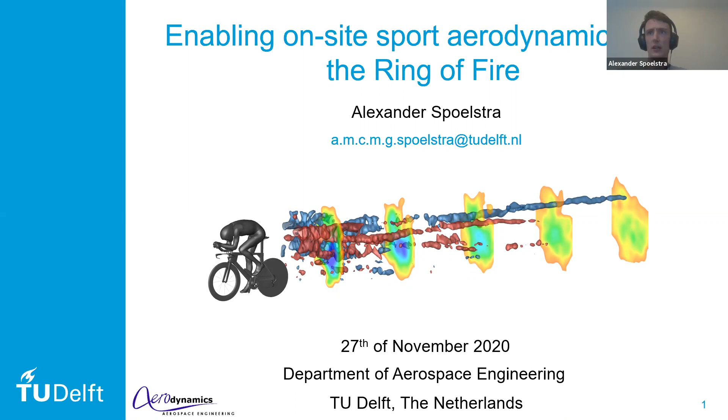With the Ring of Fire, we would like to make an addition to that, namely an on-site technique that is also able to visualize the flow field. So what is the Ring of Fire? Well, it's a system that performs on-site, full-scale aerodynamic drag measurements on an athlete in the field, while cycling

on a track or on the road. At the same time, we make quantitative flow visualizations in the wake of the athlete, using PIV, particle image velocimetry, and then we can relate these flow visualizations to the drag force. That's the main concept. So how do we get this drag force from the Ring of Fire?

As you see in this animation, we take a few velocity fields. We measure velocity fields upstream before passage of the cyclist, and we measure velocity fields in its wake, and then we set up a control volume. A different way of looking at it

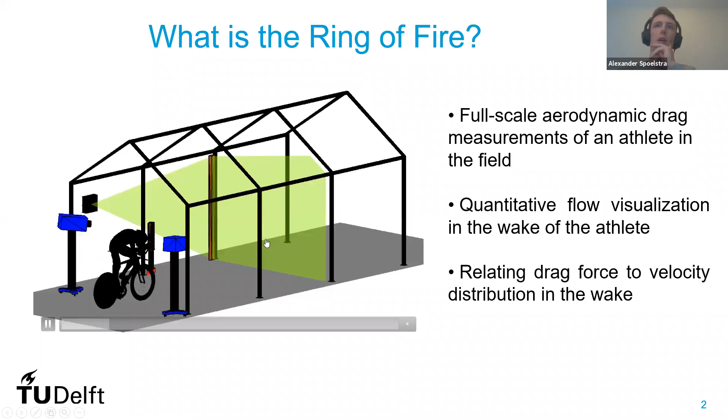is in this frame of reference, where our cyclist is moving at a constant velocity uc. We measure our environmental velocity field and our wake velocity field, and then we set up a control volume, a momentum balance, where if we take the flow fields upstream and downstream of the cyclist far enough away, we can neglect the pressure term. We are left with an equation that only depends on the environmental velocity field, the wake velocity field that we measure, the cyclist velocity, and the density of the flow.

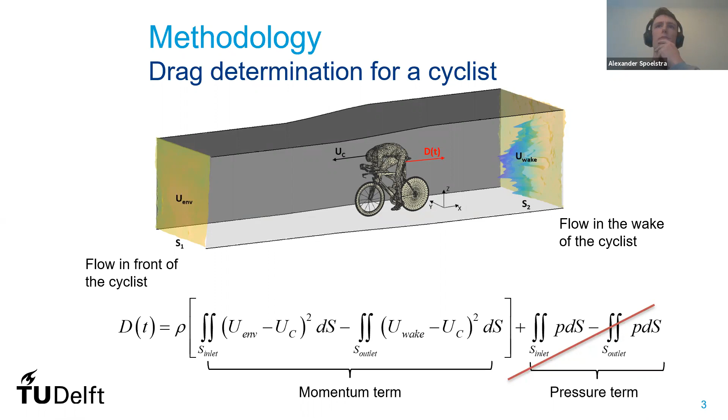This idea of the Ring of Fire actually came around in 2015 by Sciacchitano et al., who imagined that the use of helium-filled soap bubbles could increase the scale of PIV measurements, allowing us to perform on-site measurements on a full-scale cyclist.

In 2017, Terra et al. performed the first proof of concept study, to see if this idea of the Ring of Fire would actually work, on a small-scale sphere of diameter 10 centimeters. I will not go too much into detail on those results, but I will mainly focus in this presentation on the 4 experiments that we have done with cyclists.

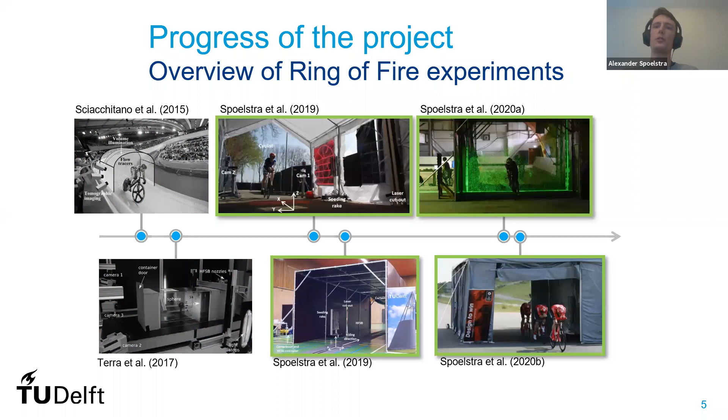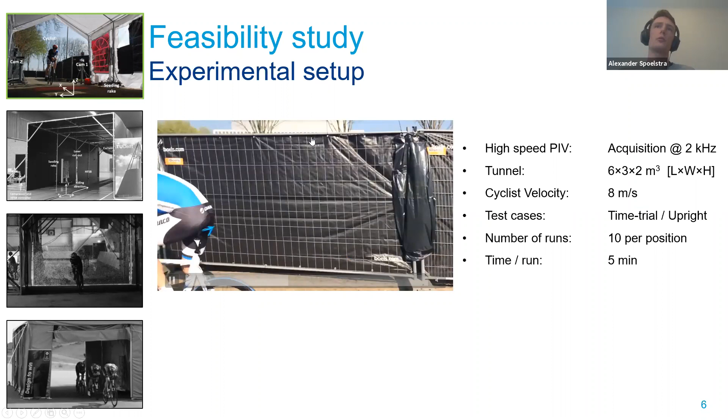The first experiment that we have done with a real-life cyclist was in the back of our lab, with a party tent. We set up a tunnel to confine the bubbles. We let our cyclist pass through there at 8 meters per second, around 30 kilometers per hour, in both time trial and upright position. So you see him here in the video passing in upright position.

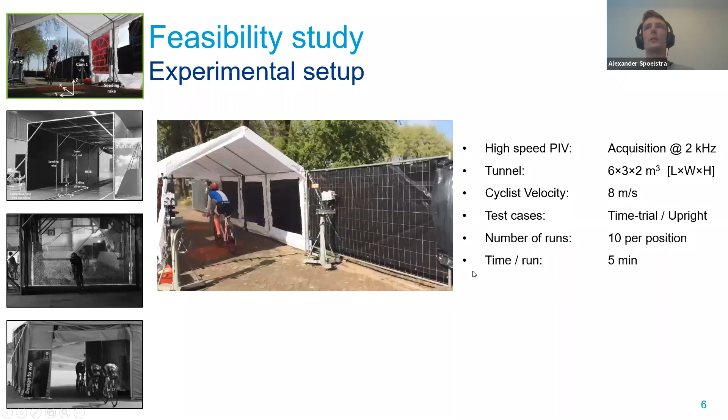We let him pass 10 times in each position, and we acquired the data at 2 kilohertz, because at that point in time we were still not 100% sure which data would be interesting for us. So we tried to measure as much as possible.

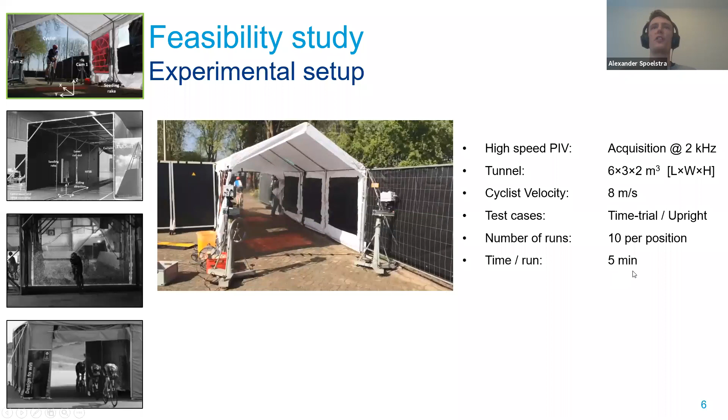The downside of measuring at such a high frequency is that we gather a lot of data, and to store that data, to transfer it from the camera to the computer, took about 5 minutes per run, per measurement. That's not ideal for future applications, where if you want to do a measurement on a track, you would ideally do a measurement every 20 seconds.

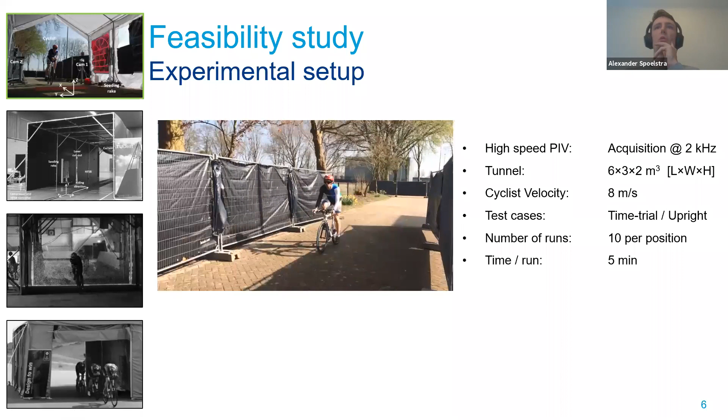Looking into some results of this experiment, we first got the flow visualization. We compared it to literature, and we saw quite good agreement there with wind tunnel tests. Then we looked at the development of the wake

over time, and we saw, as we expected, that the peak velocity deficit in the wake decreased over time, and the wake broadened over time. What we didn't expect was that in the far wake, our field of view would be too small and the wake would go outside of the field of view. So that was already a learning point, number one.

Below, you see a nice visualization where we see some vortices, and then velocity planes over time in the wake.

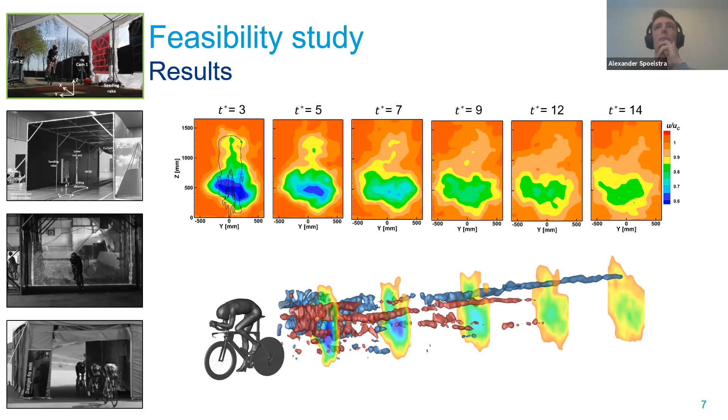Converting these velocity fields to drag, we see that for the upright and the time trial position, we can actually measure the distinct variation. We expect high drag for the upright case and lower drag for the time trial case, the aero position.

When we compare this to literature values, we saw that we are at least in the right region of drag, so we are actually measuring the correct amounts of drag.

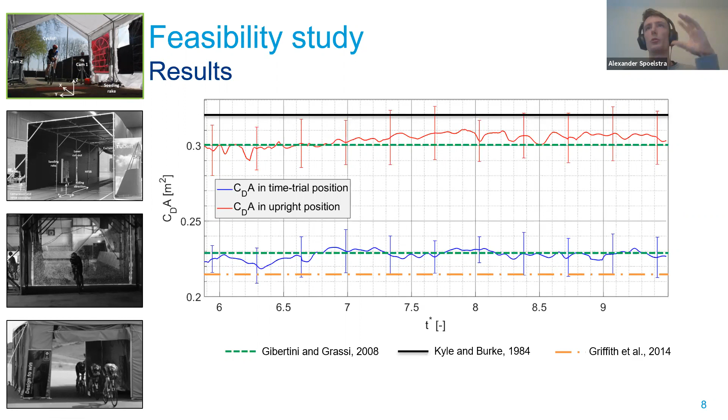So we still see that there is plus minus 5% uncertainty, which is rather high. So we wanted to repeat this experiment in a more controlled environment to see if we could reduce the uncertainty on these measurements. So we did a second experiment.

As you see from the video, it was already a bit more professional. We increased the size of the tunnel to reduce the blockage. This time we used a low-speed PIV system, since we learned from the previous experiment that if we have a measurement plane every meter or 1.5 meters, we would have enough data.

For drag computation, we let our cyclist pass at 5 meters per second, which is a bit on the low side for professional cyclists, but as you can see, the sports hall was not that big, so the speed was really limited because of the size of the hall. We repeated the same configurations, time trial and upright, and had about 30 runs per position this time.

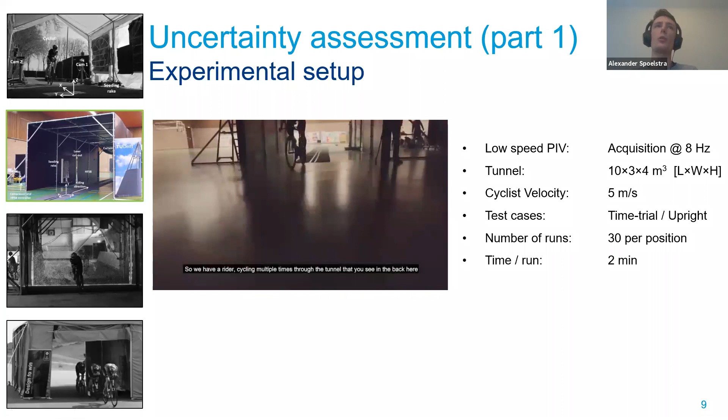Because we used a low speed system, our time per run was already reduced to about 2 minutes. If we compare the drag values of this indoor experiment on the left here to our outdoor experiment, which I present on the right, we see that we again capture the difference between upright and time trial position.

By going indoor to a more controlled environment, we already reduced the uncertainty to plus minus 2.5%. I have to say here that the fact that the average drag is different is because we used a different bike and different cyclists in both experiments. So we only look at the deltas and at the uncertainties here.

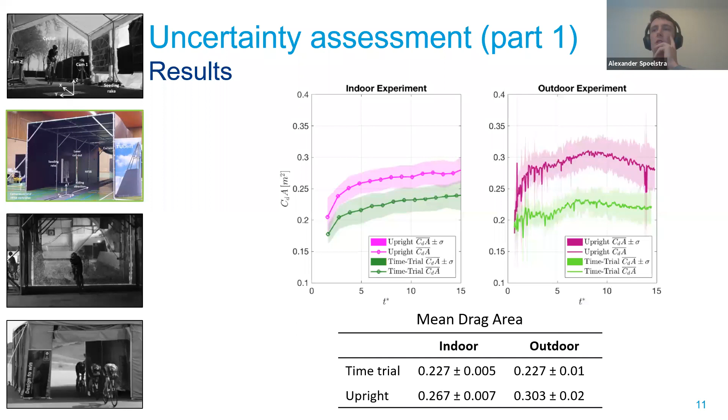So for this experiment, we already reduced it to plus minus 2.5%. Then we again compared it to literature values. In the previous experiment, I showed you that the ring of fire was in the right area of drag values, and I chose three studies that were close to our results.

If we now take a larger set of data from literature, we see that first of all there's quite a spread in the literature, but our ring of fire data falls nicely into that spread of drag values that we see in literature. However, we are still a bit on the low side of the velocity spectrum.

So the next thing we wanted to try with the next experiment was two things: can we first determine where the uncertainty is coming from? What is influencing this plus minus 2.5% uncertainty? And second, can we perform simultaneous power meter measurements, the track measurements that Harm was talking about before?

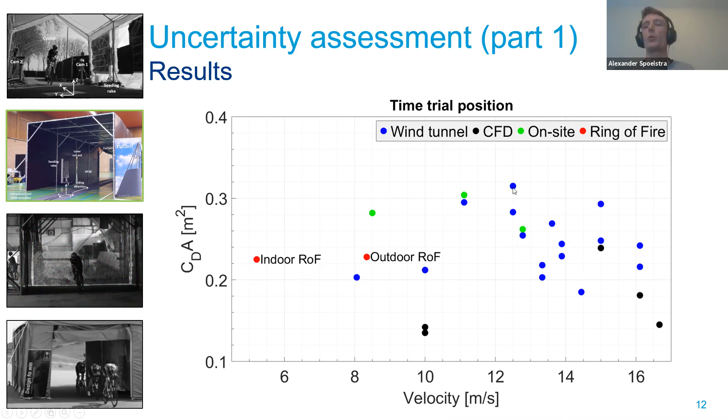Can we then give a direct comparison to simultaneously acquired power meter data, so that we have a better comparison than in the previous slide where we compared to this bunch of data from different cyclists and different methods? So we performed a third experiment, again indoor, again low speed.

We used the same tunnel. In this ice skating hall, we were able to go up to 8 meters per second again. Then, like the previous two measurements, we wanted to see: can we still capture the large scale aerodynamic changes, but also can we now capture small scale aerodynamic changes?

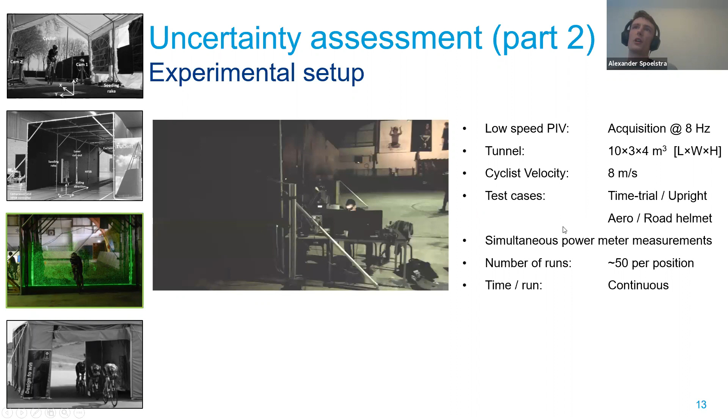So we tested time trial and upright again, and then in time trial position we tested the aero helmet that you see in the video, and we also used a normal road helmet. We were interested if we could measure that drag variation. Here we have about 50 runs per position.

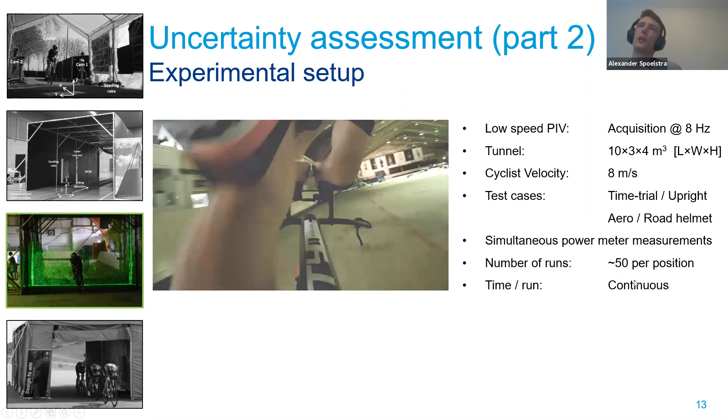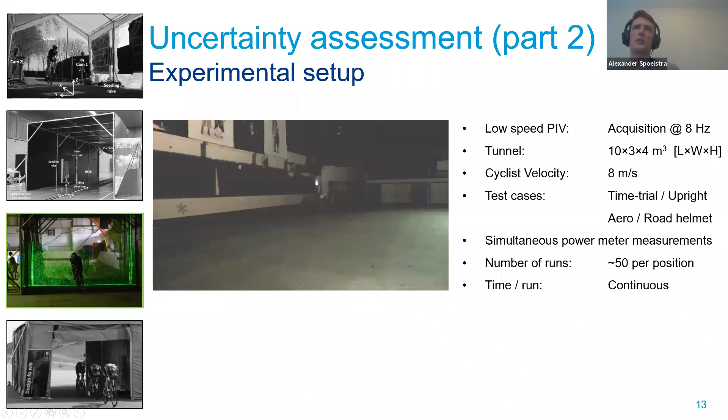Since we added a triggering system, we could just let our cyclist ride continuously through the hall, and every time he passed we could do a measurement, which was about every minute, every half a minute, or two minutes.

If we then look at our sensitivity analysis, or the uncertainty, we saw that the most important PIV processing parameter was the size of the interrogation window. We see that from smallest to biggest that we tested, if it's too small the uncertainty really grows, and we found the sweet spot is between 5 to 25% of the characteristic length scale.

But maybe even more important, what we found is that when we apply a dedicated wake contour and only measure the wake of the cyclist, only the velocity in the wake of the cyclist, and we apply conservation of mass, we get actually the most accurate drag measurement. So we don't take into account all these small fluctuations in the environmental velocity, which in the end adds up to quite some error.

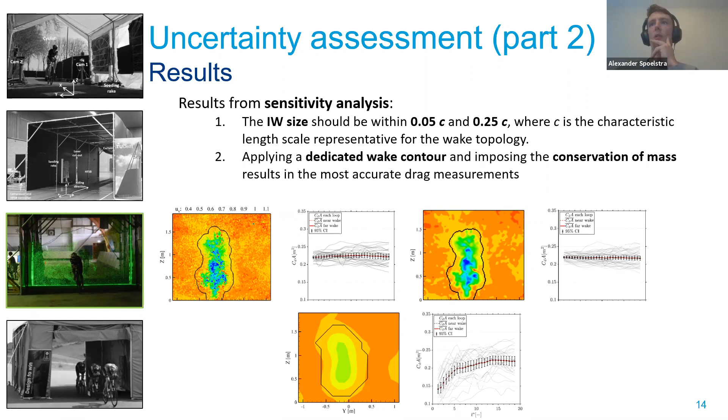If we then compare these results to our power meter, we see that we capture the same, so we can capture both the large scale as well as the small scale variations, and we are in the same range at the same deltas as measured by the power meter. However, the power meter model is highly influenceable by the settings you choose for rolling resistance, etc.

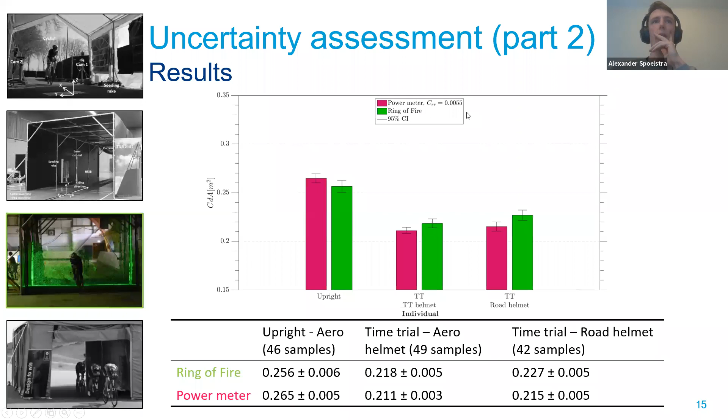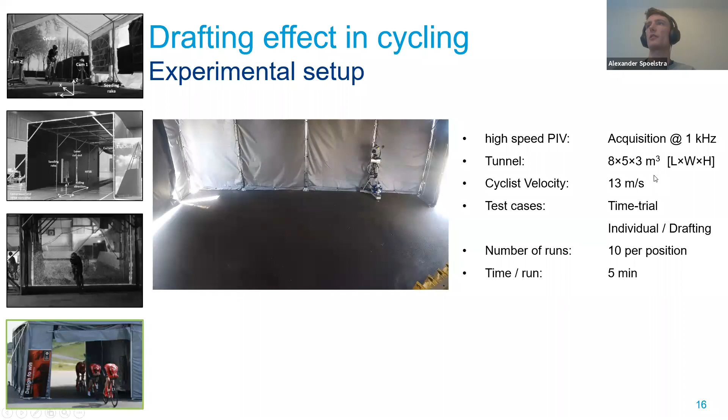To quickly round up, because my time is almost finished: our fourth experiment, which was already talked about by Harm, was the drafting experiment, where we tested both individual riders and drafting, so we could see how much drag reduction was found by drafting in both lateral and longitudinal positions. We went at 13 meters per second this time, and again used 1 kilohertz acquisition because drafting gave us a few extra complications.

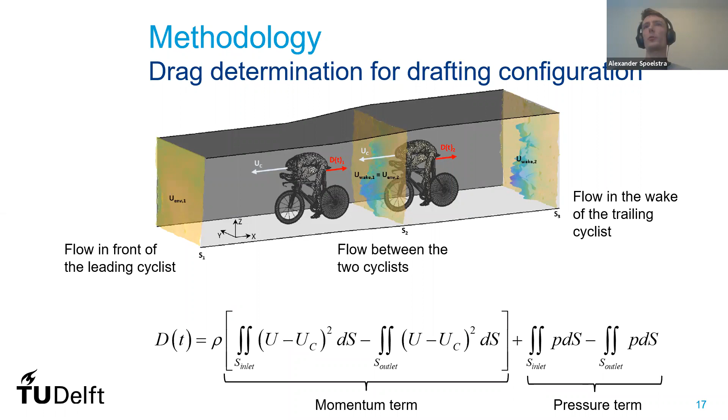Namely, if you want to compute the drag for the first cyclist, you would need this control volume, and for the second cyclist, you would need the controlled volume from the plane in the middle and the back. So we needed this velocity plane in the middle, in between the two cyclists. And because we cannot choose a control volume that is far away from the cyclist, we also needed to include the pressure term.

Some minor issues we found is that when we want to capture this field in between the cyclists, we really get the shadows of the trailing cyclist, which we then needed to remove with some extra processing. So there was an extra processing step in between for the drafting cases.

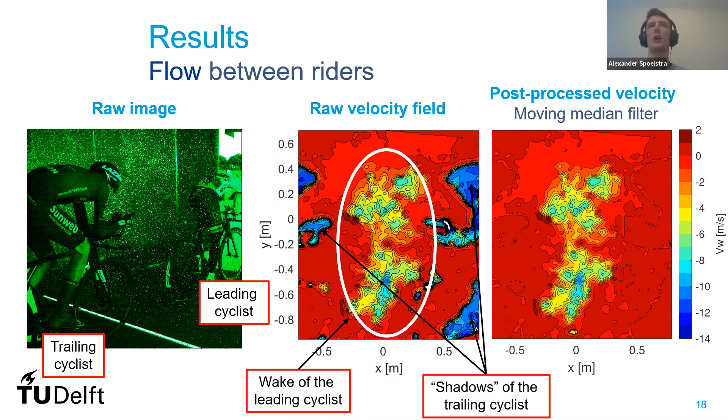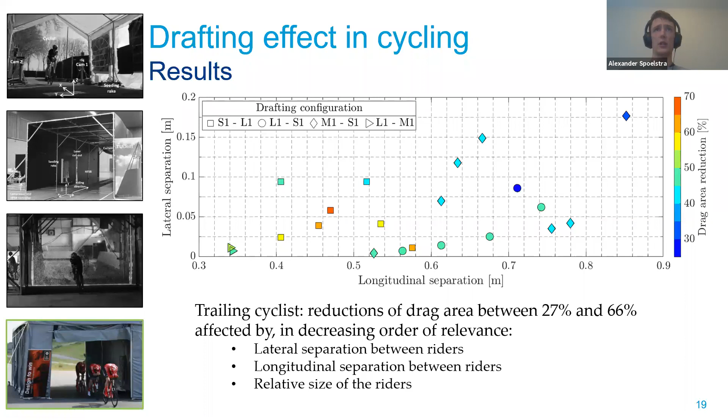This plot, I can skip it. We can discuss if there are questions about it, because Harm already discussed most of it. So with that, I would like to thank you for your attention, and I'm open for questions.